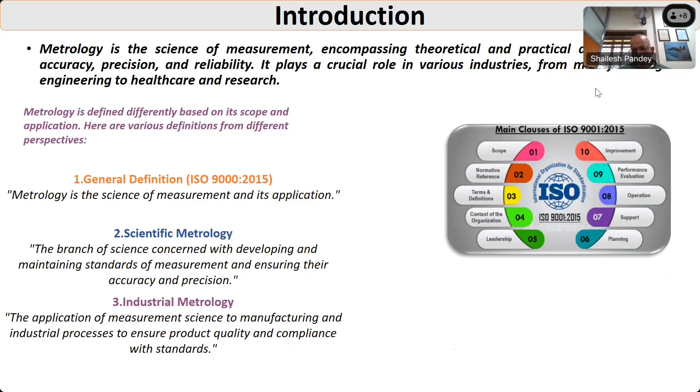Here, on the right side, we have shown the different clauses that are applicable for metrology as per the ISO.

If we talk about the historical perspective of metrology, it is defined as the study of measurement principles and techniques that have evolved over time to establish a universally accepted measurement system.

The definition of metrology changes from use to use. If we talk about legal metrology, it is the part of metrology that deals with regulation, standards, and law to ensure fairness and reliability in trade, health, and safety.

If we talk about applied metrology, it is the practical implementation of measurement techniques across different industries, ensuring process control and quality assurance. Each definition emphasizes different aspects of metrology depending upon its theoretical, practical, and regulatory importance.

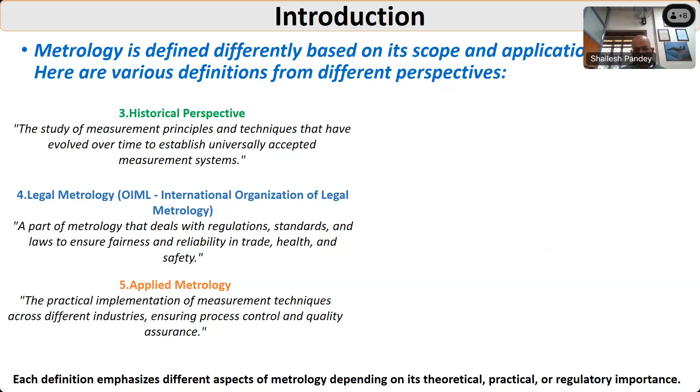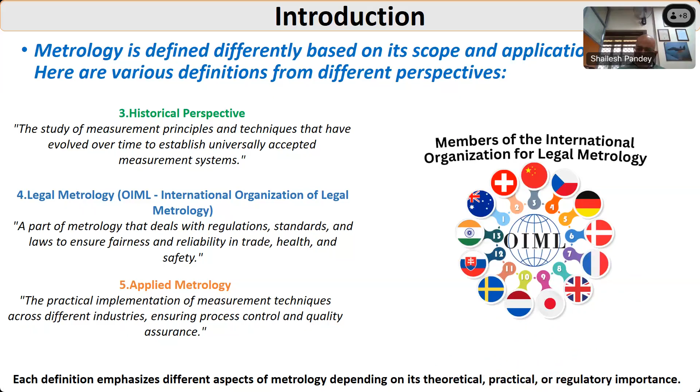As per my knowledge, we have 13 organizations that are totally associated within this legal metrology.

If we talk about the fundamental aspects of metrology: these include the unit of measurement based on the international system, SI. Then we can talk about traceability, ensuring measurements are linked to national or international standards. Then we have calibration adjustment to maintain measurement accuracy, and accuracy versus precision.

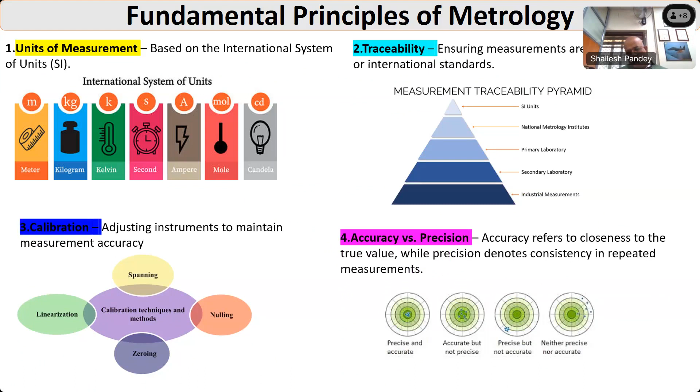If we talk about accuracy versus precision: accuracy refers to the closeness to the true value, while precision denotes consistency in repeated measurement.

Calibration is the adjustment of the instrument to maintain measurement accuracy. Calibration techniques and methods depend upon spanning, nulling, linearization, and zeroing. These are the aspects of metrology.

If we talk about standards of measurement, we discuss measurement standards and branches of metrology. Standards can be a primary standard, secondary standard, or working standard.

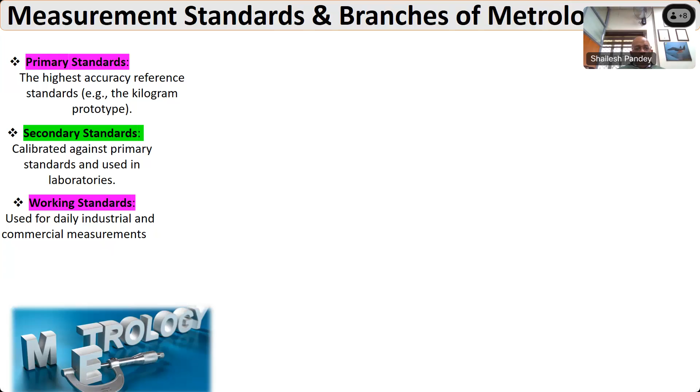The primary standard is the reference standard with the highest accuracy. The secondary standard is used for laboratory purposes and is calibrated against the primary standard. The working standard is what we use in our daily life.

Now we talk about the branches of metrology, as we discussed in the definitions also: scientific metrology, industrial metrology, and legal metrology.

Scientific metrology deals with the establishment and maintenance of fundamental measurement units, and is governed by organizations like the International Bureau of Weights and Measures.

Industrial metrology ensures precision in manufacturing, engineering, and product quality, including calibration of instruments, quality control, and process validation.

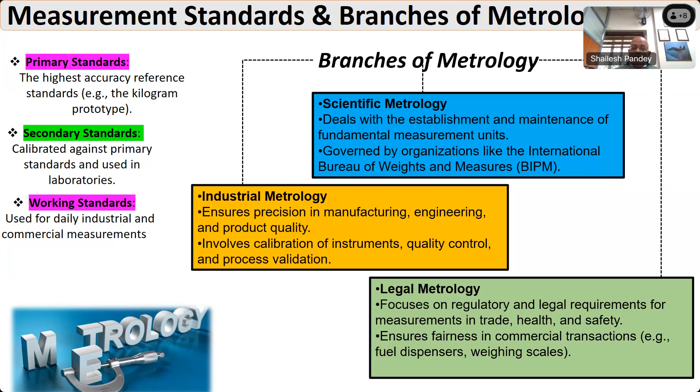Legal metrology focuses on the regulatory and legal requirements for measurement in trade, health, and safety. This ensures fairness in commercial transactions.

If we talk about the theoretical model, we have shown the theoretical model of measurement: first classical measurement theory, then statistical measurement theory, then quantum metrology. Classical measurement theory is totally based on physical standards and direct comparison. An example of classical measurement is length measured using a ruler, or time using clocks.

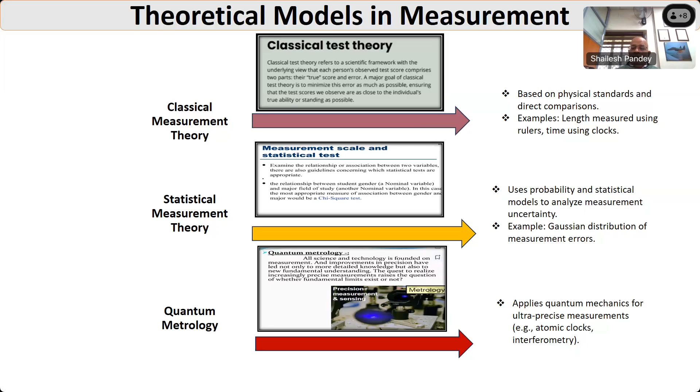If we talk about statistical measurement theory, it uses probability and statistical models to analyze measurement uncertainty. The best example of this is the Gaussian distribution of measurement error. We talk about quantum metrology—everybody is talking about quantum now—which uses quantum mechanics for ultra-precise requirements, such as atomic clocks and interferometry.

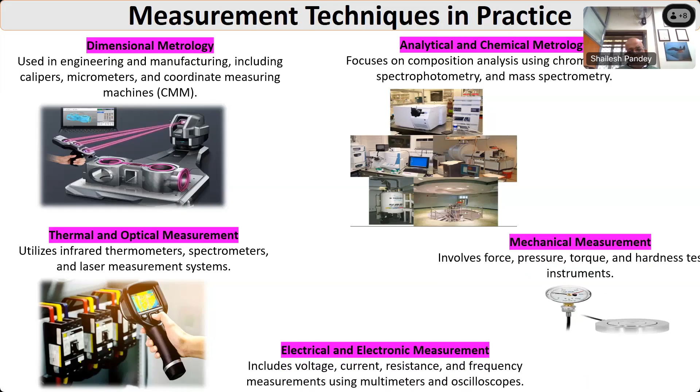Dimensional metrology is used in engineering and manufacturing, including calipers, micrometers, and coordinate measuring machines. Thermal and optical measurement utilizes infrared thermometers, spectrometers, and laser measurement systems. Analytical and chemical metrology focuses on composition analysis using chromatography, spectrophotometry, and mass spectrometry. Mechanical measurement involves force and pressure measurement. Electrical and electronic measurement deals with current, resistance, and voltage measurement.

Now we are going to talk about the measurement of wear through metrology. Before moving to this topic, what is the physical significance of wear? What is the physical significance of wear through metrology, or friction in metrology?

We all know that it is not possible to survive without friction. We always say in layman language, 'घर्षण में ही आकर्षण है' - if there is no friction, there is no entertainment in life. If there is no friction, we are not able to survive, and we are not able to walk on the surface. So friction is required, wear is required, but there should be some balance. Somewhere we have to increase the friction, somewhere decrease it; somewhere wear is required to achieve the desired qualities, and somewhere we have to control the wear to achieve our desired output.

If we talk about wear in the pencil - if there is no wear in the pencil, there is no use of the pencil, because we are using the pencil to write because of its rubbing property and its wearing property. If there is no wear in the pencil, then it cannot be of any use.

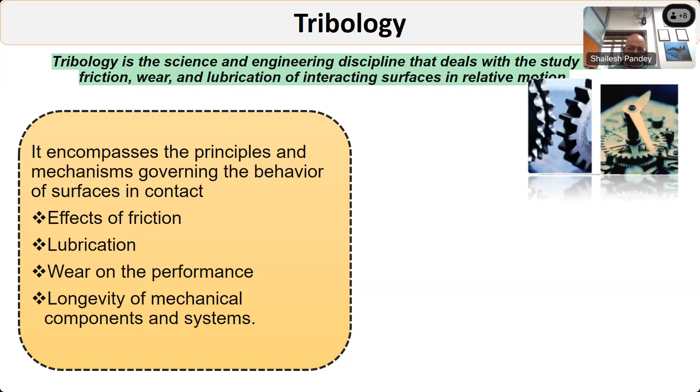If we talk about the significance of tribology - because of the development and lots of research in tribology and coating, automobiles and aero turbines now allow us to fly from one country to another, one continent to another. This is all because of advancement of technology in wear, coating, and friction. If we talk about energy efficiency, we have achieved it because we have developed technologies to reduce friction and wear up to an optimum condition, so that we are getting the highest energy efficiency in different applications.

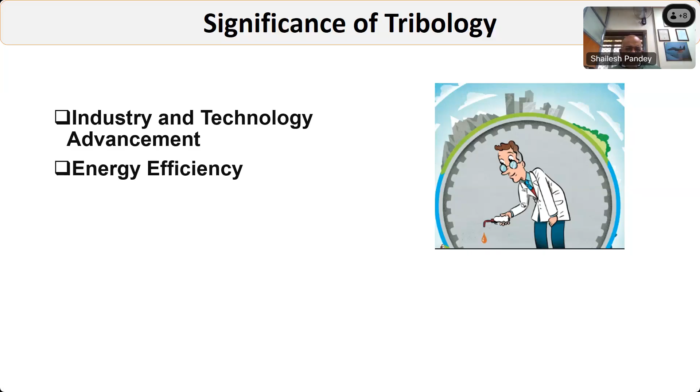Even friction and wear are so well controlled in the automobile engine that we are able to achieve efficiency up to around 30 to 33%. We are working to achieve more, about 50%, but as per current research, we are up to 33-34%.

If we are able to control the wear, then we are able to control micro particles in the environment and the different gases that get oxidized because of higher temperature. If we are able to control friction and wear, we can improve the life of any working component, as well as improve the living condition for our upcoming generation.

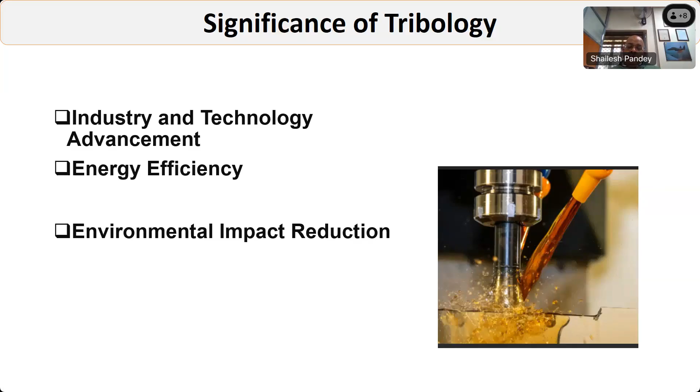This is going to impact us - if there is too much loss because of friction and wear, we have to replace the component again and again. That is an extra burden on industries, an extra burden for the customer. From the customer, this burden goes to the industries; from industry, it becomes a burden for the country. If we are able to control wear and friction, we are contributing to the country in a positive manner, and we are contributing to the economic growth of the country.

Tribological metrology basically involves the measurement and characterization of surfaces and their interaction under various tribological conditions. In tribological metrology, we are having friction, wear, and lubrication. We study the measurement of wear and how we can control and characterize the wear.

Surface topography is also part of tribological metrology, including quantification of friction and wear and surface topography analysis. This allows precise measurement of frictional forces and wear rate between two bodies that are in relative motion. Surface topography analysis enables detailed analysis of surface topography, including roughness, texture, and features such as asperities.

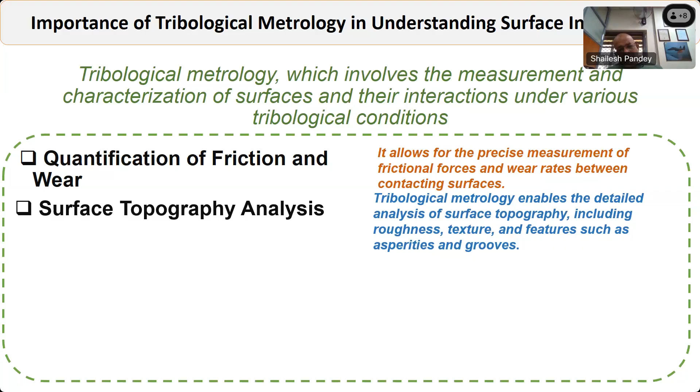Film thickness measurement, or lubricant film thickness measurement, is also part of tribological metrology. This information is essential for evaluating the effectiveness of the lubricant in reducing friction and preventing direct metal-to-metal contact, thereby minimizing wear and investigating the contact mechanics. If we are able to investigate the contact mechanism, we can determine which type of wear is occurring on the surface and which mechanism—whether abrasive, adhesive, or erosive—is happening. Depending upon the wear mechanism, since every wear mechanism is correlated with the type of force impacting the surface, we can control the wear.

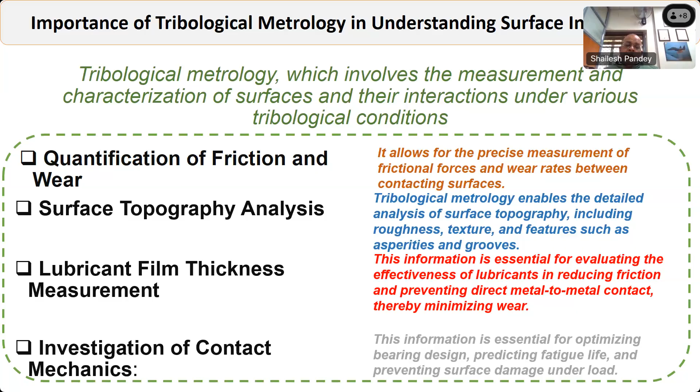Characterization of surface chemistry is also a part of tribological metrology. Surface chemistry influences the adhesion, friction, and wear behavior of the material, making it critical for understanding and controlling surface interaction.

Evaluation of the tribofilm and surface modification: tribological metrology techniques are used to characterize tribofilm formed on the sliding surface, as well as surface modifications such as coating, treatment, and texture. Lots of researchers are working on coating because it is not possible to manufacture tailor-made materials for every application, as that is very costly and would not be economical for industrial application. So we have to search for an alternative to tailor the properties of the material—that alternative organizations are opting for is coating.

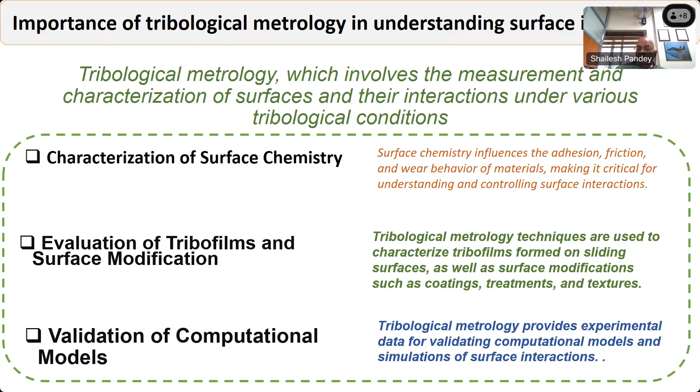We are talking about tribological metrology, and tribology comes into the picture. If there is no friction, there is no discussion of tribology—discussing tribology means there is friction. Friction can be classified into two parts: static friction and kinetic friction. Static friction refers to the frictional force that prevents an object from moving when an external force is applied to it but hasn't exceeded the maximum force of static friction.

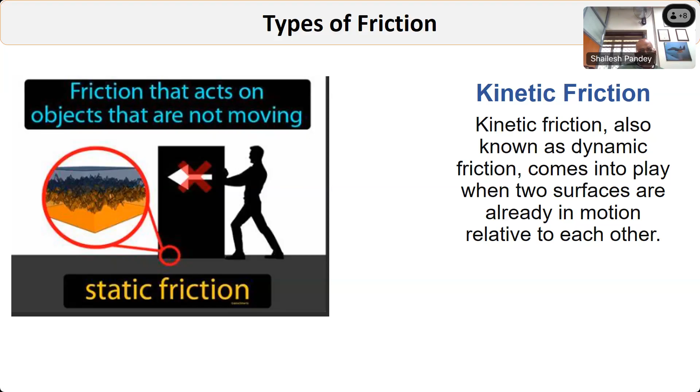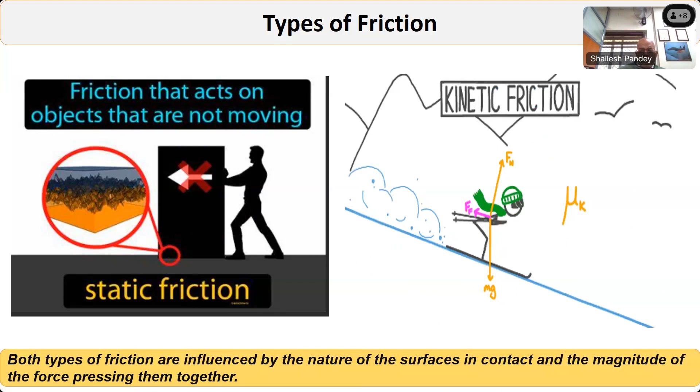Both types of friction are influenced by the nature of the surfaces in contact and the magnitude of the force that is pressing them against each other.

Now we'll briefly discuss the different types of equipment used for the characterization of these frictions. First, we talk about the tribometer. Basically, a tribometer is equipment that is used to calculate the wear, friction, and patterns of wear on any relative body.

In this, we have two bodies: one is the object, and the other is the counter body. If the object and counter body are in relative motion, with the help of sensors and different mechanisms, the most prominent being the weight loss mechanism, we can collect the wear data in terms of weight loss.

We have to collect the weight loss data by measuring the substrate before putting it for the experiment and after completing the experiment. Then we can measure the weight loss with precise equipment and get the wear of the surface. By analyzing the track depth, we can get which type of wear mechanism is occurring.

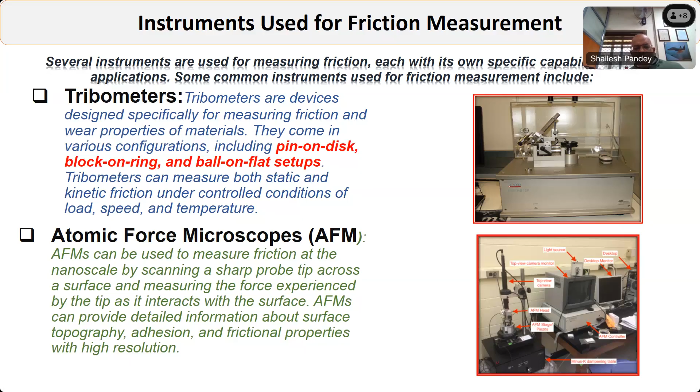On the right side, we have shown pictures of the tribometer. The first one is the pin on disc tribometer, and the second one is the atomic force microscope.

Instead of this pin on disc tribometer, we also have the friction tester, and we also have a bench top testing machine. Now let's discuss the importance of friction measurement in material selection and design.

What is the importance of friction measurement in material selection and design? First, we can do performance optimization, and we can do friction and wear prediction and prevention.

We can do prediction of wear, prediction of failure, prediction of friction, so that we can forecast the approximate working time of any equipment. If we talk about performance optimization, friction directly affects the performance of the mechanical system.

By accurately measuring the friction coefficient between different materials, engineers can select the most suitable material and surface treatment to optimize performance, efficiency, and reliability. If we talk about wear prediction and prevention, friction measurement helps in predicting and preventing wear of mechanical components.

This is done by minimizing wear and extending the lifespan of critical components, reducing maintenance cost and downtime. If we are somehow able to forecast the exact time of wear, then we can reduce the downtime. And if we are able to reduce the downtime, the efficiency and productivity can be increased.

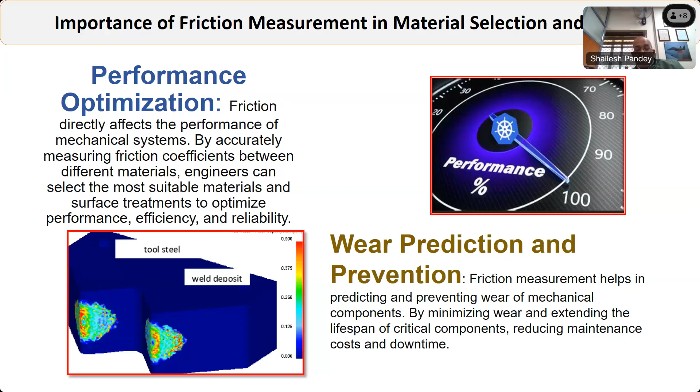If we are able to analyze the friction and wear properties, then we can select the material for a specific application. Because sometimes we need to select the material for higher temperature applications.

If we are sending any spacecraft into space, then we have to choose a material that can work across a range of temperatures, generally from minus 50 degrees to plus 150 degrees.

There is lots of variation, and depending upon the knowledge of friction, wear, and properties of the material at different temperatures, we can select the material for a specific application. And if we are selecting the material for a turbine, the property requirements are something different.

If we are choosing the material for the pencil, the properties are different. If we are choosing the material for the disc brake, the properties are different. If we are choosing the material for steering, automobile crankshaft, automobile engine, automobile piston, then properties are different.

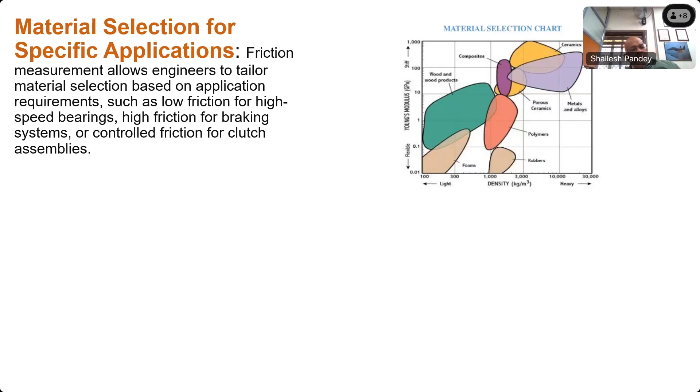Having accurate knowledge of friction and wear measurement allows engineers to tailor material selection based on application requirements, such as low friction for high speed bearings and high friction for braking systems, or controlled friction for clutch assemblies. That totally depends upon the knowledge of friction. By comparing experimental results and theoretical predictions, engineers can improve the accuracy and reliability of simulation models, leading to better informed material selection and design.

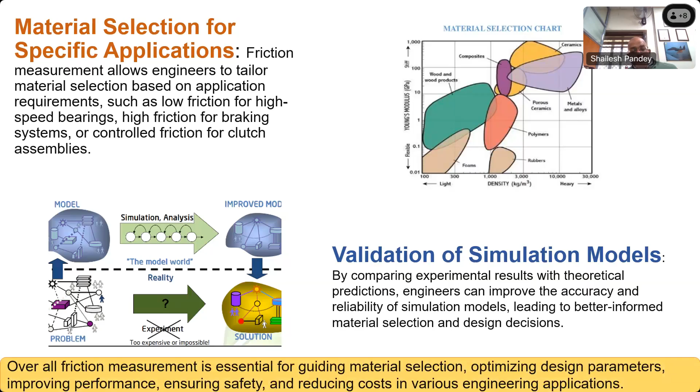Overall, friction measurement is essential for guiding material selection, optimizing design parameters, improving performance, ensuring safety, and reducing cost in various engineering applications.

Now we are talking about friction, we are talking about wear, we are talking about selection of material depending upon previous knowledge of friction and wear. Here it's very important to discuss different types of wear mechanisms and why these wear mechanisms happen. First is the abrasive wear mechanism, and second is the adhesive wear mechanism. Then we have erosive wear mechanism, abrasion, erosion, scratching. All these are wear mechanisms.

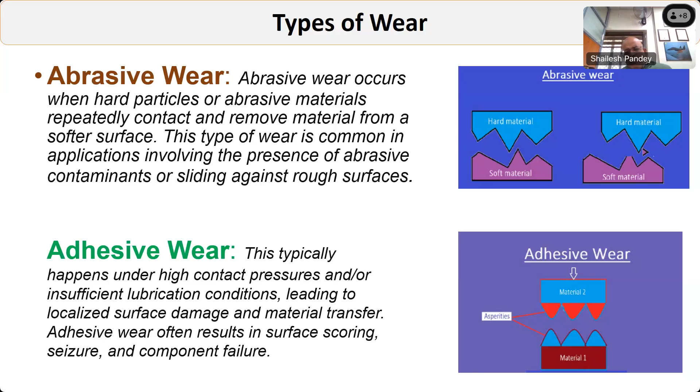Let's discuss the abrasive wear mechanism. If two materials come in contact with each other, one hard and one soft, what happens when the hard material contacts the soft material? The hard material pulls off some part from the soft material, taking some of its material. This is known as abrasive wear, and lots of abrasion, lots of scratches will be there on the surface, and you can get a clear visible mark on the surface of the soft material.

You can get the picture of lining, picture of erosion on the surface of the soft material. Abrasive wear occurs when hard or abrasive particles repeatedly contact and remove material from a softer surface. This type of wear is common in applications involving the presence of abrasive contaminants or sliding against rough surfaces. When any body is sliding against a rough surface, or hard material is rubbing on soft material, this type of wear is often seen.

If we talk about piston and cylinder motion, this type of wear is very predominant and dominating in piston and cylinder movement.

If we talk about adhesive wear, as its name suggests, this involves adhesion. If some material is pulled off or detached from one surface and attaches to another surface, this is known as adhesive wear. This typically happens under high contact pressure or insufficient lubrication conditions, leading to localized surface damage and material transfer. Adhesive wear often results in surface scoring, seizure, and component failure.

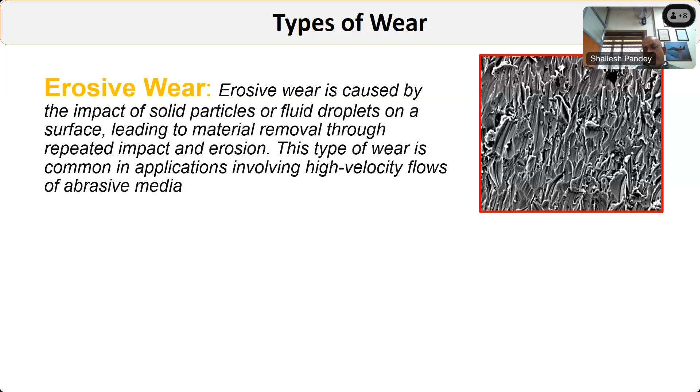Everybody knows about corrosive wear. If any material is not properly protected and is in touch with the atmosphere, then oxidation of the surface occurs, with a slight increase in temperature, and because of oxidation, the material gets corroded.

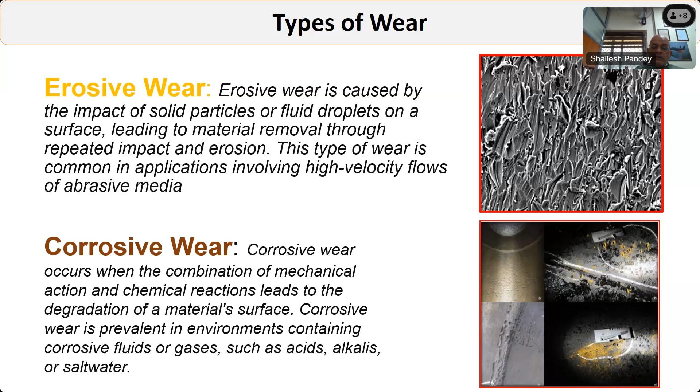Corrosive wear occurs when a combination of mechanical action and chemical action leads to the degradation of material on the surface. Corrosive wear is prevalent in environments containing corrosive fluids or gases such as acid, alkali, and salt water.

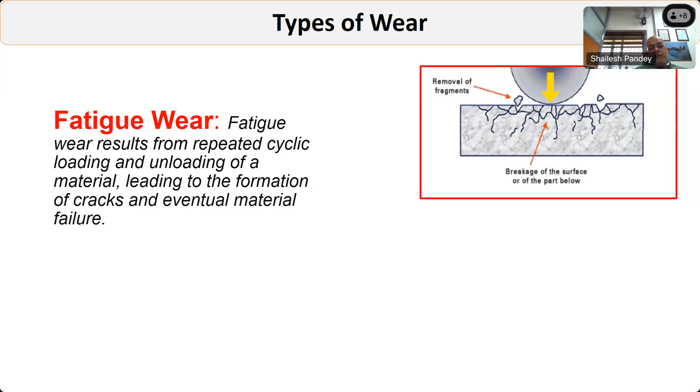Fatigue wear results from repeated cyclic loading and unloading of a material, leading to the formation of cracks and eventual material failure. Fretting wear occurs at the interface between two surfaces under slight relative motion, typically induced by vibration and oscillation.

Understanding the mechanism and characteristics of different types of wear is essential for selecting appropriate material, lubricant, and surface treatment to mitigate the wear. And if we are somehow able to mitigate the wear, then we can improve the reliability and longevity of any mechanical component.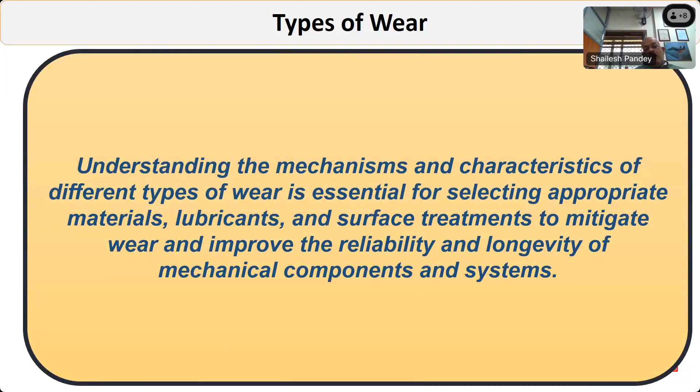How can we measure the wear? We know we have to control the wear, but without knowledge, without measurement of wear, we cannot do anything.

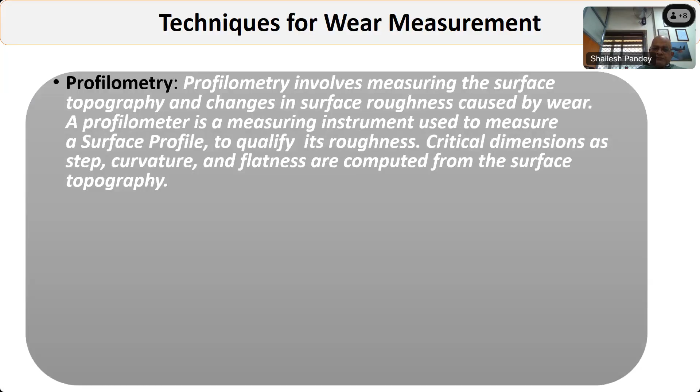Either we can measure the wear with the help of the weight loss method, that is measuring the weight before the experiment and after the experiment. But for that we need a very accurate weighing machine, and this is a very cumbersome process to measure the material before and after the experiment, and there is some loss of material in the environment also. So we cannot think that weighing the material before and after the experiment is worth it. But in most labs, we are measuring wear with the help of the weight loss method.

But if we have the facility of a profilometer, the profilometer is the best. We measure the wear of any surface with the help of a profilometer. In the profilometer, we take the picture or profile of the surface before the experiment and after the experiment, and with the help of overlapping techniques, we get the loss of material.

Profilometry involves measuring the surface topography and change in surface roughness caused by wear. A profilometer is a measuring instrument used to measure the surface profile to quantify its roughness. Critical dimensions such as step, curvature, and flatness are computed from the surface topography.

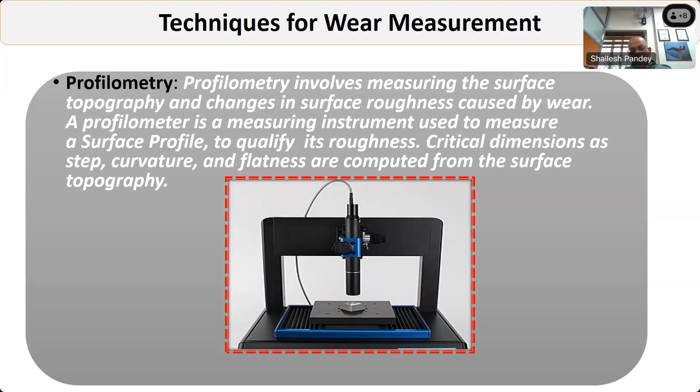We can also do wear scar analysis. Wear scar analysis involves measuring the dimension and characteristics of the wear scars found on the surface due to wear. This can be done using an optical microscope or scanning electron microscope to quantify parameters such as wear scar diameter, shape, size, and area of distribution. Wear scar analysis is particularly useful for assessing adhesive wear, abrasive wear, and erosive wear.

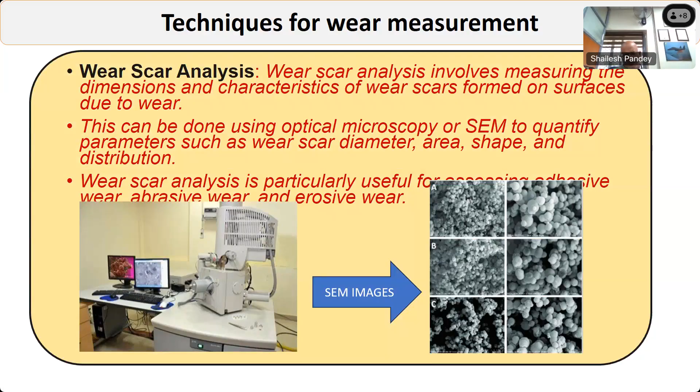Here you can see this is not a scanning electron microscope micrograph of wear scars, but a simple SEM diagram.

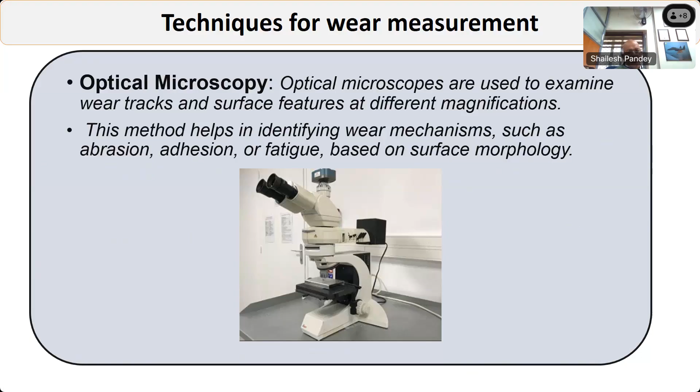Optical microscopes are used to examine wear tracks and surface features at different magnifications. This method helps in identifying wear mechanisms such as abrasion, adhesion, and fatigue based on the surface morphology.

Now, this is a very important equipment for analyzing the surface morphology: the scanning electron microscope and atomic force microscope. This is very useful, and is the heart of any material characterization or surface topography study. It offers high resolution imaging of the wear surface, allowing detailed examination of features such as cracks, pits, or material transfer. Energy dispersive spectroscopy can be coupled with SEM to analyze the elemental composition of wear debris.

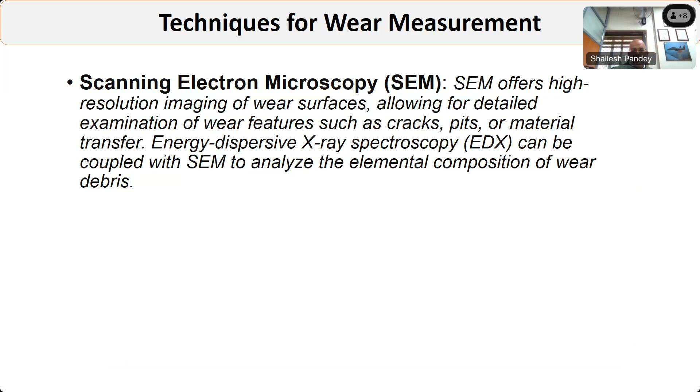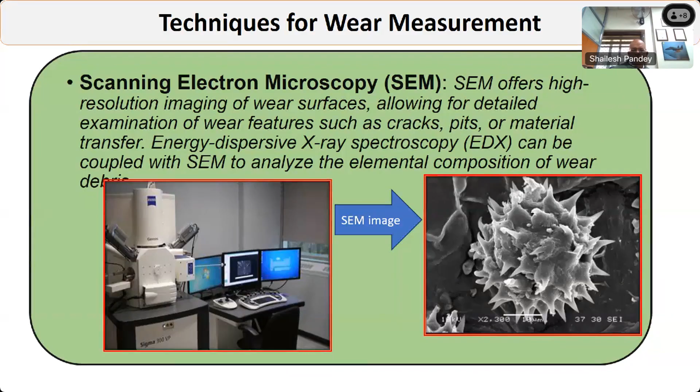This is a micrograph taken from the scanning electron microscope, and this is a picture of one of my coating surfaces.

And if we want to measure the topography on the nanoscale, then we have to use the atomic force microscope. This atomic force microscope is costly in comparison to the scanning electron microscope, but it provides nanoscale resolution of the surface topography, allowing precise measurement of wear-induced surface changes at the atomic level. This technique is particularly useful for studying wear in thin films or at the nanometer scale.

Micro hardness testing is basically used to measure surface properties. If we talk in terms of wear, we measure the micro hardness of the surface before the wear test and after the wear test, and we analyze whether the hardness of the material is increasing or decreasing. We have to predict which type of wear is there and how much temperature is involved, and such Vickers or Knoop hardness tests are performed on the wear track to assess the change in material hardness due to wear. This technique helps in understanding the material property alterations induced by the wear process.

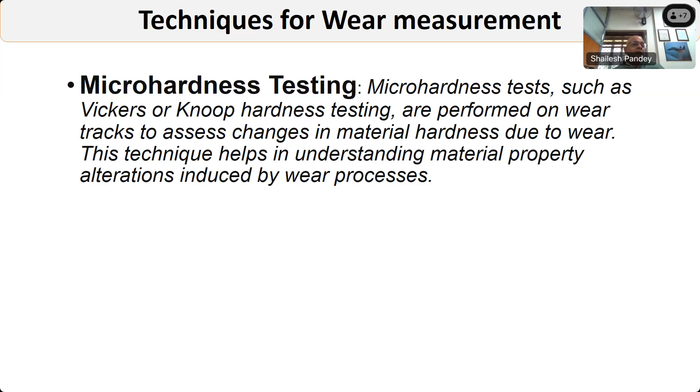We are talking about the changes induced by the wear process, and about the temperature that occurs during the process of wear.

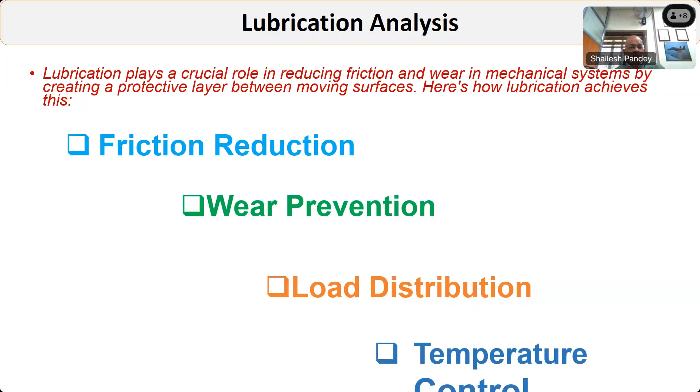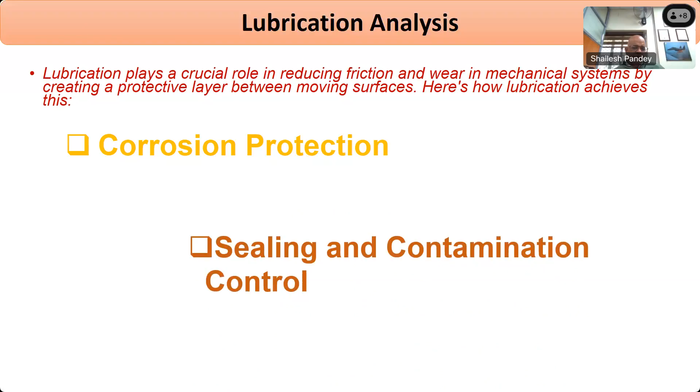Lubrication plays a very crucial role wherever it is used, including in the bearing mechanism. It is used for friction reduction, wear prevention, and most importantly, distribution of load on the surface. If the load is distributed properly, wear will be reduced. Lubrication also helps control temperature, provides corrosion protection, sealing and contamination control, and enhances overall performance.

How can we measure the film thickness of this lubrication? Optical interferometry, ultrasonic interferometry, and electrical capacitance measurement are used.

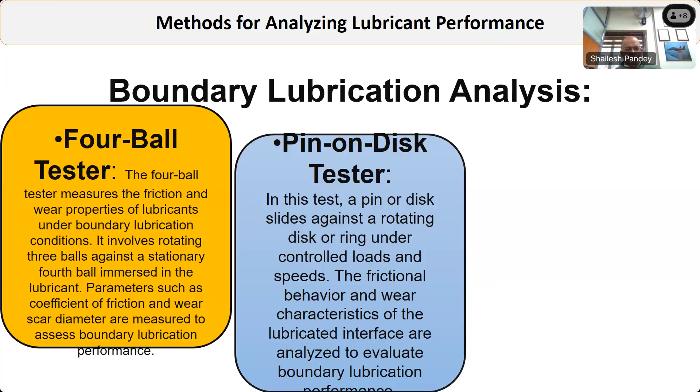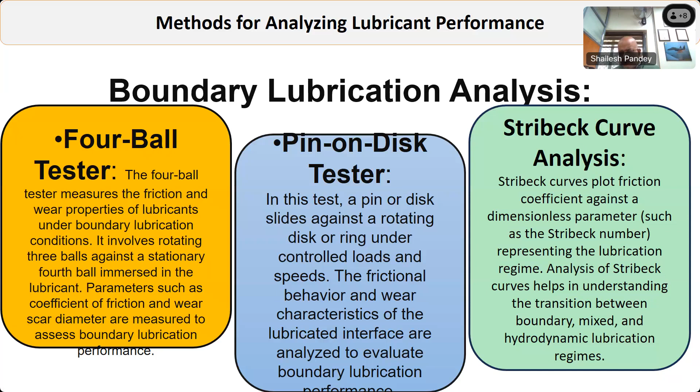How can we analyze the performance of lubrication? We can analyze it with the help of boundary lubrication analysis. For this, we have the 4-ball tester, Pin-on-Disc tester, and Stribeck curve analysis. We have different boundary layer lubrication techniques to analyze lubricant performance. The Pin-on-Disc tester is basically used in laboratories, and the Stribeck curve analysis is generally used in different applications.

Now, if we talk about chemical analysis using viscometers, various types such as rotational viscometer, capillary viscometer, and falling ball viscometer are used to measure the viscosity of the lubricant at different shear rates and temperatures. Viscosity is a critical parameter influencing lubricant performance and film formation.

Then we have FTIR spectroscopy, which is basically used to analyze the chemical composition of the lubricant and identify degradation products. Changes in lubricant chemistry over time can impact lubricant life, so it's important to control the composition. If there is degradation or change in the components, it means the lubricant is losing its properties. With FTIR, we can characterize the material, study molecular interactions, and do quality control of the lubricant.

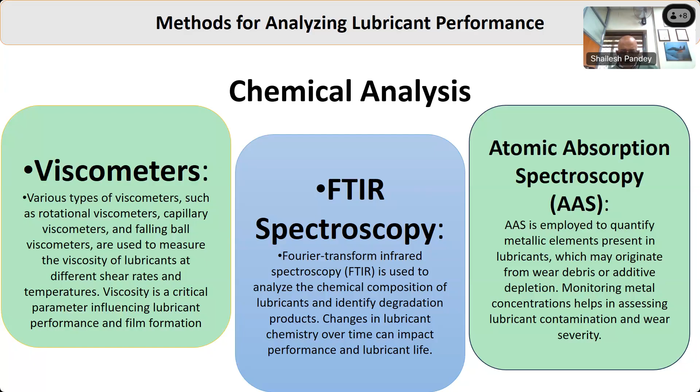Atomic absorption spectroscopy is also used. The importance of discussing these different measurement and metrological techniques is so that we can reduce friction and wear, improve efficiency, and prevent component failure. These are our three main targets: reducing friction and wear, improving efficiency, and preventing component failure.

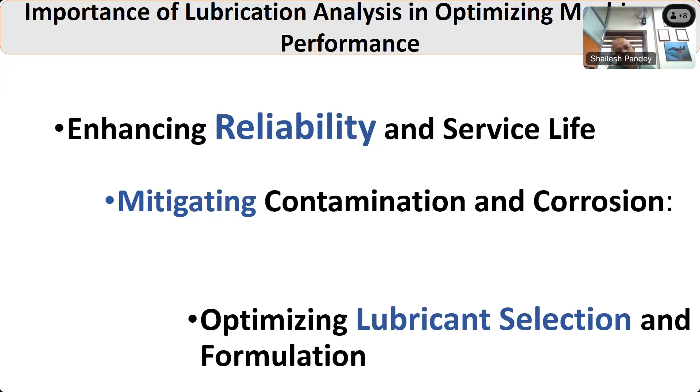Additionally, we can achieve enhanced reliability if we have better control over friction and wear. This helps improve reliability, mitigate contamination, and optimize lubricant selection.

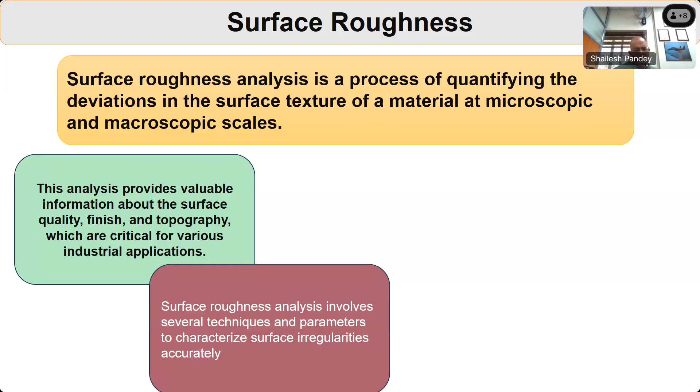Now we come to another metrological aspect: the metrology of surface roughness. We can measure surface roughness with the help of a scanning electron microscope, an atomic force microscope, or a Taylor-Hobson profilometer. Surface roughness analysis is the process of quantifying deviations in the surface texture of a material at macroscopic and microscopic levels. This analysis provides valuable information about surface quality, finish, and topography, which are critical for various industrial applications. Surface roughness analysis involves several techniques and parameters to characterize surface irregularities accurately.

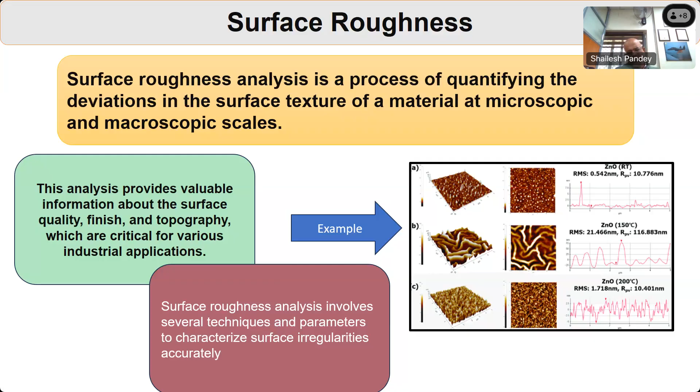Here, on the right side, we have shown the AFM image of a surface. With the help of this, we can characterize the surface completely, showing how the peaks and features vary. With the help of contact profilometry, we can also do surface analysis, which involves physically scanning a stylus or probe across the surface and measuring vertical displacement to determine surface roughness. Common contact profilometers include the stylus profilometer and atomic force microscope.

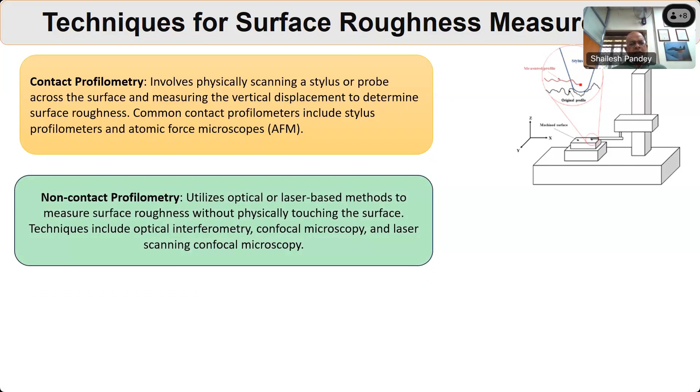If we talk about non-contact profilometers, they utilize optical and laser-based methods to measure surface roughness without physically touching the surface. Techniques include optical interferometry, confocal microscopy, and laser scanning confocal microscopy. 3D surface metrology captures three-dimensional surface profiles to analyze surface roughness in detail, using techniques like white light interferometry, coherence scanning interferometry, and focus variation microscopy.

Now we talk about friction. Friction basically depends upon three factors, which can be classified into three aspects: one is the contact area, the second is interlocking and adhesion, and the third is hysteresis and energy dissipation.

Rough surfaces have more contact points and asperities, resulting in a larger real area of contact compared to smoother surfaces. This increased contact area leads to higher interfacial adhesion forces and frictional resistance during sliding and rolling. Asperities on rough surfaces can interlock and adhere to each other, generating higher frictional forces. This adhesion mechanism contributes to elevated friction coefficients, especially under boundary lubrication conditions where direct metal-to-metal contact occurs.

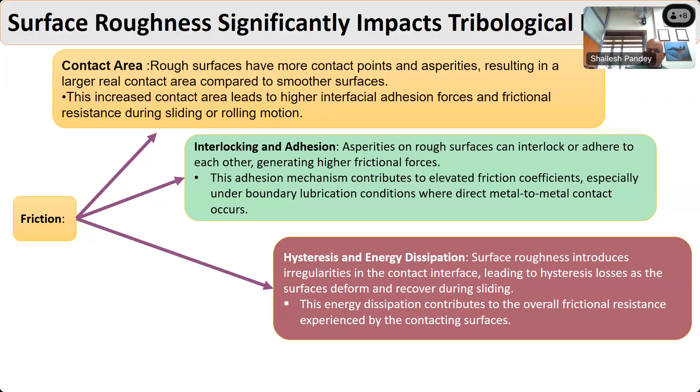If we talk about hysteresis and energy dissipation, surface roughness introduces irregularities in the contact surface, leading to hysteresis losses as the surface deforms and recovers during sliding. This energy dissipation contributes to the overall frictional resistance experienced by the contacting surfaces.

Now we have discussed this: lubrication, we have discussed this. Contact profilometer, we have discussed this. We have discussed this.

These are the equipment that we are having in our laboratory. If anybody is interested in doing tests on this equipment, we have the pycnometer for density measurement, we have the XRD, we have the FESEM, we have the ion sputtering unit. We also have Raman spectrometry and an indentation instrument. If anybody would like to work on this equipment, he can contact me anytime.

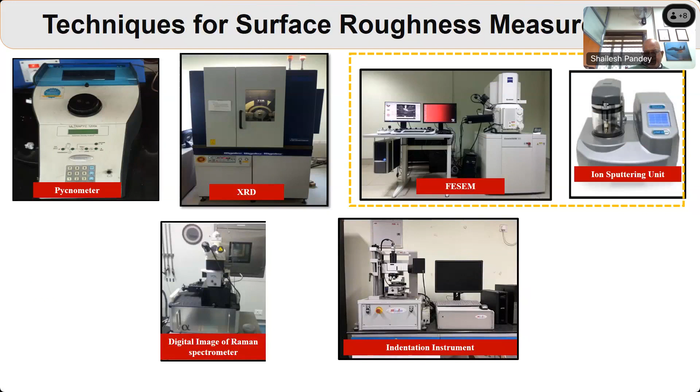Significance of surface roughness analysis along with friction and wear. What is the significance? Why are we doing the surface roughness analysis in such detail?

Surface roughness quantification is basically the quantification of the contact area. With the help of this, we can do identification of the wear mechanism. We can also do prediction of frictional behavior, understanding of the lubrication effect, optimization of surface treatment, and validation of the wear model.

Now we have shown a case study. This is part of our research publication measuring the wear behavior of alumina reinforced GNP and nanodiamond. We have prepared a coating that is alumina reinforced with graphene nanoplatelets and nanodiamond.

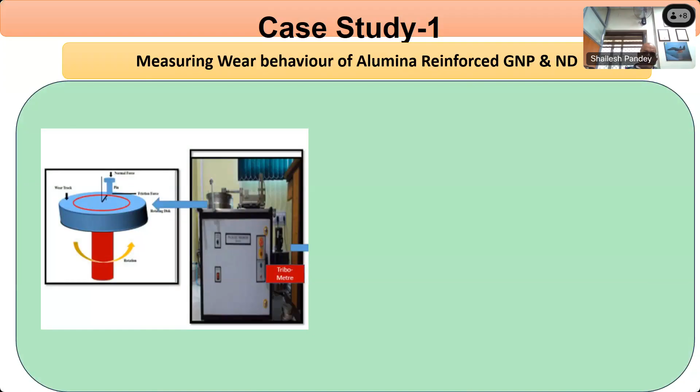In this, we have performed the pin on disk tribometric test on the surface. For the performance of the test, the parameters were 10 Newton, 15 Newton, and 20 Newton. The sliding velocity was 0.156 meter per second, and speed was around 250 RPM.

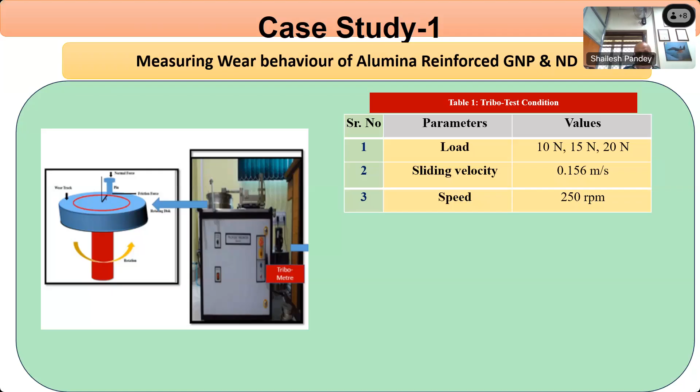We are performing this case study for automobile applications. Based on different literature reviews, the load that can be applied on automobile components—specifically engine parts like the piston and cylinder movement—can be around 10, 15, or 20 Newton. So we are taking these values, while sliding speed and RPM we are keeping constant.

In this, we have considered the counter body as a ball on disc, with the diameter of the counter body around 6 millimeters, made of tungsten carbide, similar for all tests. For the disc, we have taken different types of disc with different types of coating. The disc is 60 millimeters in diameter with a thickness of 2 millimeters, made of mild steel with composite coating of Al2O3.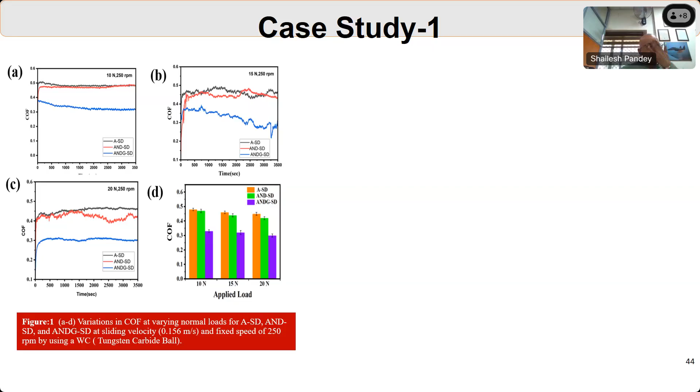Here the coefficient of friction is demarcated with different colors: ASD, ANDSD, ANDGSD—that is, aluminum oxide with nanodiamond powder, then aluminum oxide with nanodiamond and graphene nanopowder. We found that if we add graphene nanopowder and aluminum oxide to the composition, the coefficient of friction reduces, and with the reduction of the coefficient of friction, the weight loss is also reducing.

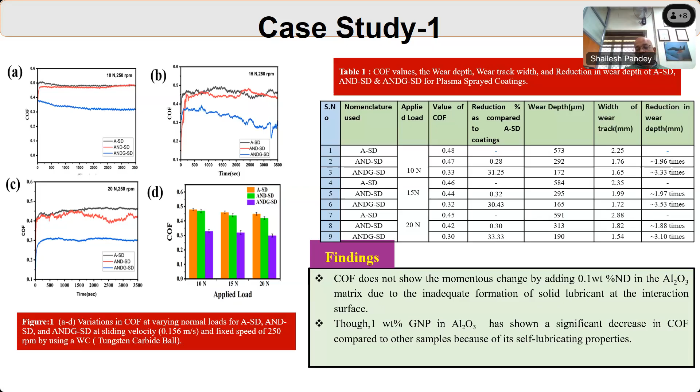The finding of this research was the coefficient of friction does not show momentous change by adding 0.1% weight of nanodiamond in Al2O3 matrix, due to inadequate formation of solid lubricant at the interaction surface. However, adding 1% by weight of GNP in Al2O3 has shown significant decrease in the coefficient of friction compared to the other sample, because of the self-lubricating property of the graphene nanopowder.

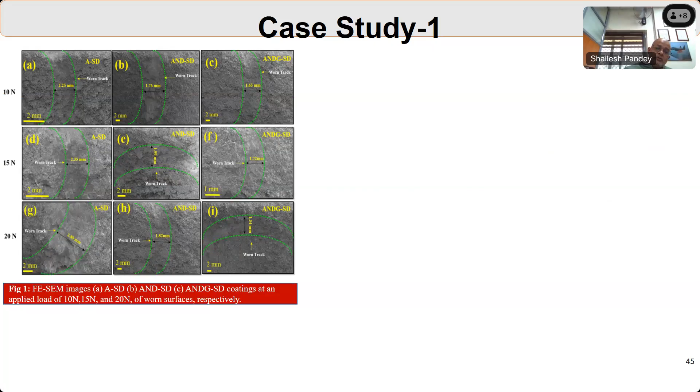Now we can go for the second case study also, similarly. This is surface scanning electron microscope of the surface coated with the help of plasma spray coating technique, available at IIT Patna. If anybody wants to do surface modification or surface coating with thermal spray coating, he can drop me a text or mail, and I'll arrange the slot at IIT Patna and do the coating.

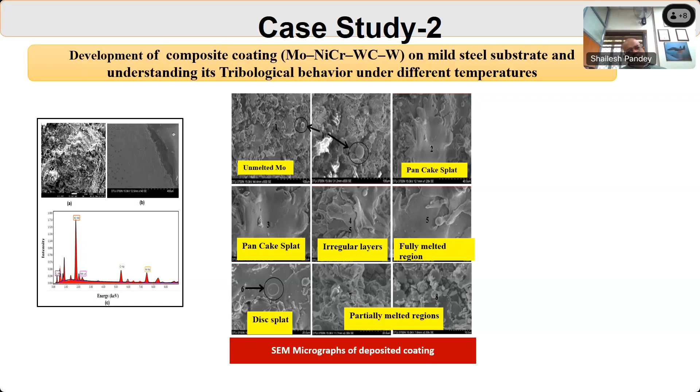Here we are having different scanning electron micrographs of the coatings. We are having the composite coating developed with the help of Mo. This is composite coating, where we are having molybdenum powder, NiCr powder, tungsten carbide powder, and tungsten mixed together.

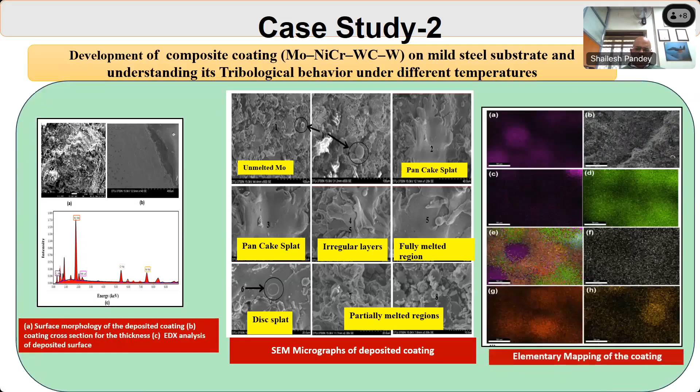We again use the pin-on-disc tribometer for the application, but here the variation in temperature and load both are there, and the experiment was very exhaustive. We have performed a study on around 180 samples to find out the result.

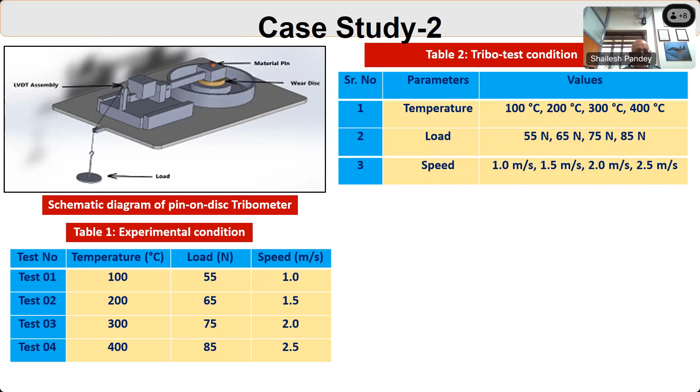The first test was at 100 degrees centigrade, the second at 200 degrees centigrade, then the third at 300 centigrade, then at 400 centigrade. Similarly, the speed was 1.5, 2, and 2.5.

For this sample also, we have taken the counter body of EN31 and disc of 2 millimeter thickness made of mild steel with the composite coating of WC, Mo, and NiCr.

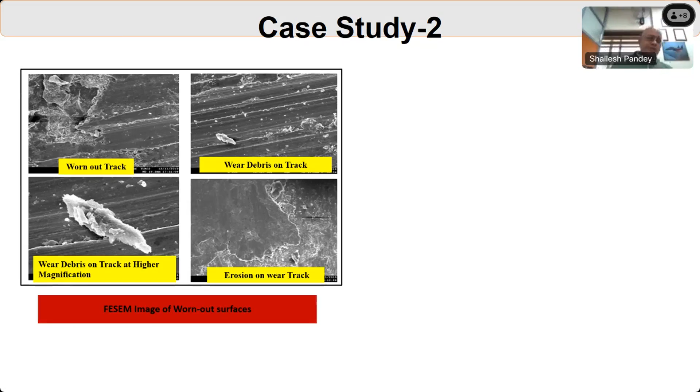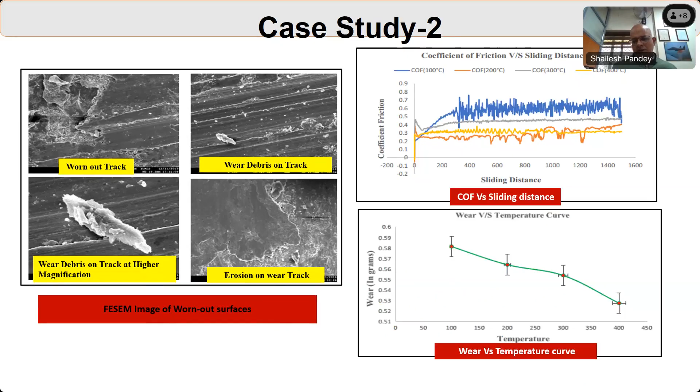In this image, you can see the scratch abrasive wear clearly, with the worn out surface visible in the SEM scanning electron microscope. On the right side, you get the pin-on-disc image, the wear pattern image from the pin-on-disc machine, and the weight loss that is decreasing with the increase of temperature.

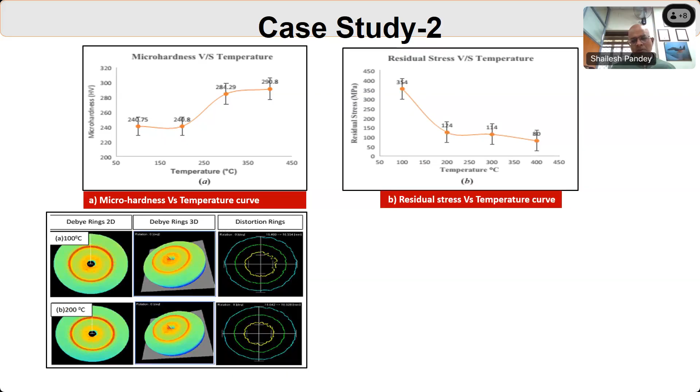And the micro hardness is increasing with the increase of temperature. This micro hardness can also be seen with the help of XRD, and with the help of XRD, the residual stress is decreasing with the increase of temperature. It means while we are increasing the temperature, the stress relieving process is happening.

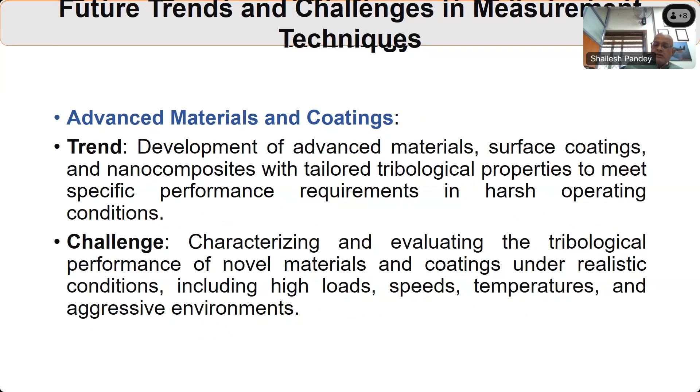Now researchers have started talking about nano tribology and surface engineering and in-situ real-time monitoring, but we have not worked on this till now. For advanced materials and coatings, we are having different trends and challenges for this.

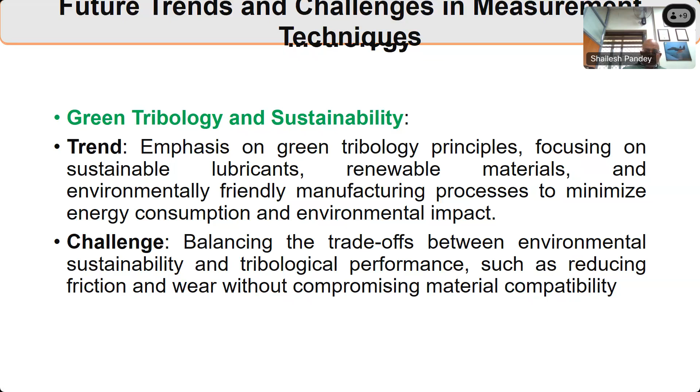Then we can go for green tribology and sustainability. Almost all industries are working on green tribology and sustainability. This basically emphasizes the green tribology principle, focusing on sustainable lubricants, renewable materials, and environmentally friendly manufacturing processes to minimize energy consumption and environmental impact. The challenge of green tribology is balancing the trade-off between environmental sustainability and tribological performance, such as reducing friction and wear without compromising material compatibility. That is very difficult.